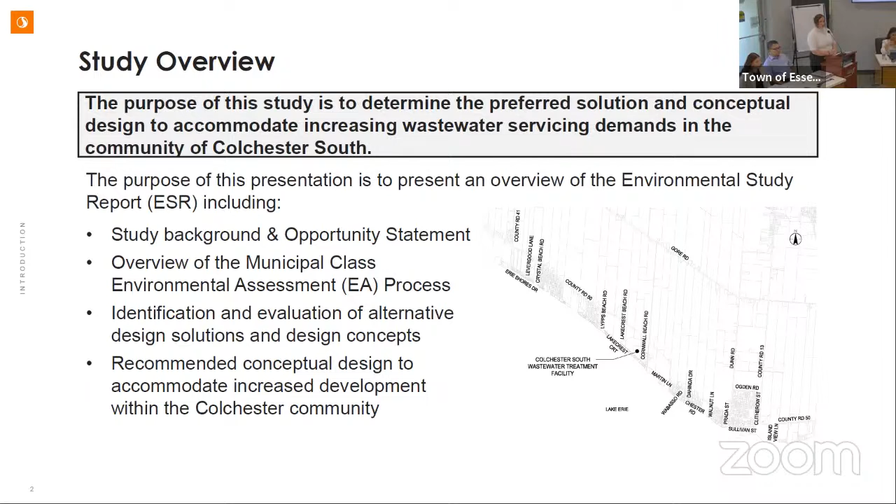For some background, the Colchester sanitary sewer system was designed and constructed in the 1980s. Based on this original design, there is a sanitary sewer system that services Colchester South from the north end at Ogden Street and County Road 50, on the east side at County Road 13 and Island View Lane, on the south side at Lake Erie, and on the west side at County Road 41.

The existing sanitary collection system consists of a gravity sewer system with 6 pumping stations. All of the wastewater is directed towards the center of this map, where it's pumped at pumping station number 1 into the Colchester South wastewater treatment facility. It's further treated and then outletted into Lake Erie.

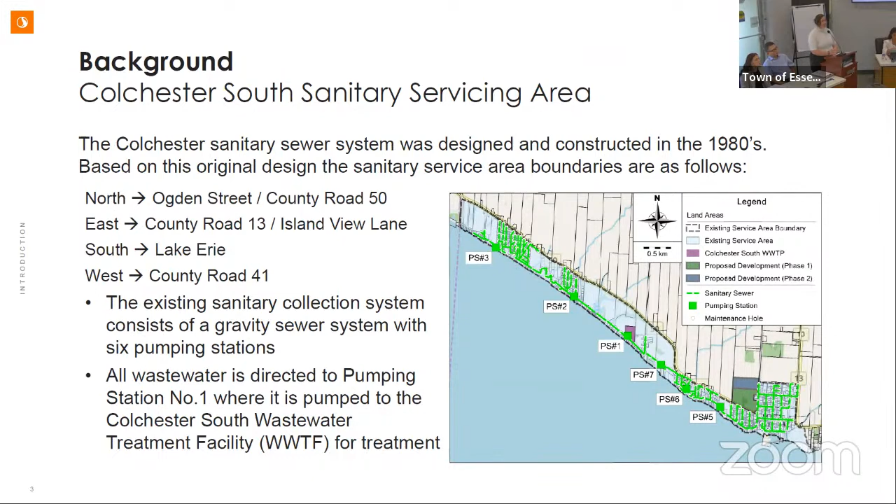The Colchester South wastewater treatment facility is located on a 12-hectare parcel of land south of County Road 50 with access off of Cornwall Beach Road. It consists of a three-cell aerated facultative sewage lagoon system with a rated capacity of approximately 1,800 meters cubed per day, and a peak flow capacity of 8,000 meters cubed per day. Based on the historical operating data, which we reviewed from 2015 until 2021, it has good historical operating performance. The final effluent concentration that is discharged into the lake is well within the non-compliance limits set by the Ministry of Environment, Conservation and Parks.

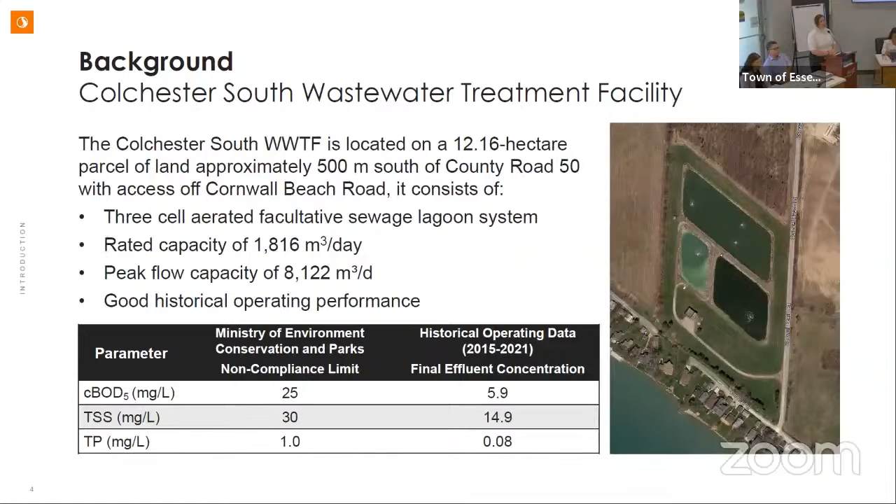As an opportunity statement for this environmental assessment, this Class EA was initiated by the Colchester Bay development, which is proposed west of the Colchester Urban Center, outside of the existing service area, meaning that it was not originally accommodated through the existing sewer system, pumping stations, and facility.

Some changes may be required in order to accommodate it. This development would potentially include mixed style residential units, parkland, a hotel, and some commercial retail spaces. So this represents an opportunity for some social and economic growth within the community.

This development would generate an increase in wastewater servicing demands beyond the existing capacity of the wastewater treatment facility. So as an opportunity statement, this study will determine a long-term solution to accommodate increased wastewater servicing from this proposed development, as well as other developments within the community and the existing Colchester South sewage servicing area.

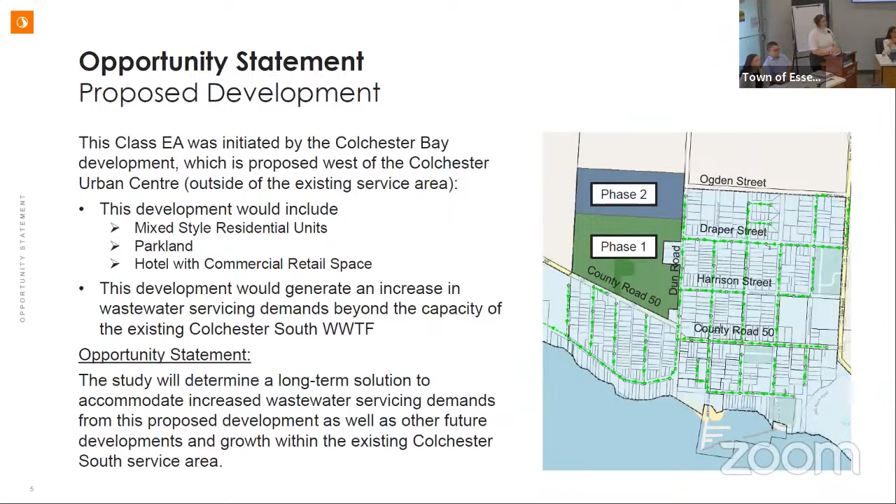Next slide. Now I'd like to present a background and the key features of the Class EA process, which was used throughout this. The Ontario Environmental Assessment Act aims to preserve, conserve, and properly manage natural, social, economic, and other environments and undertakings for any planning or developments within Ontario. So this work followed that standard procedure.

As a Schedule C project, it followed these 5 phases: phase 1, the review and identification of a problem or opportunity statement, which I discussed in my earlier slide. Phase 2 is evaluating alternative solutions to the problem. Phase 3 is evaluating alternative design concepts which can accommodate the preferred solution. Phase 4 is preparing an environmental study report. And phase 5 is implementing the preferred design.

So phases 1 through 4 were completed as a part of this EA study, and the implementation would be done as a part of future works.

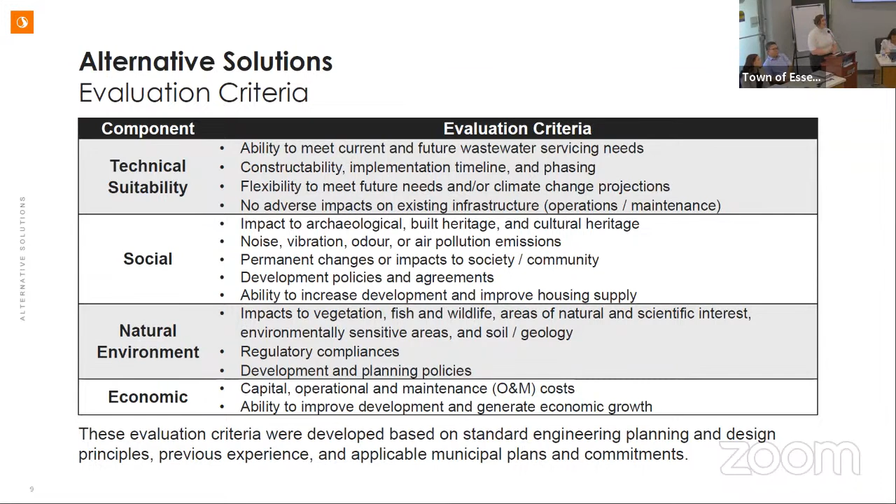Generally, they're split into 4 different categories: technical suitability, social, natural, environmental, and economic impacts. Each of the solutions was ranked or given a score in each of these categories, assessed based on these different criteria in order to get an idea of whether or not they would be considered feasible solutions.

Next slide, please. First, we started with a screening of the alternatives. The first 4 alternatives generally were not considered technically suitable. They wouldn't allow the community, or it wouldn't allow for those excess wastewater demands to be accommodated.

And that would not be seen as a socially or economically favorable solution, because it would then stagnate development, or no development would be allowed within the area. So that's the main reason why the first 4 solutions were not really considered a viable solution.

For number 5, discharging to a wastewater treatment plant outside of the Colchester community: the closest wastewater treatment plant would be in the town of Harrow, which is at a considerable distance from where pumping station 1 and the existing Colchester facility is. So although it may technically be able to accommodate those increased flows, there would be a significant environmental impact from installing the pumping stations or piping leading to the other facility, and that would also come at a significant economic cost. So that was not carried forward for detailed evaluation.

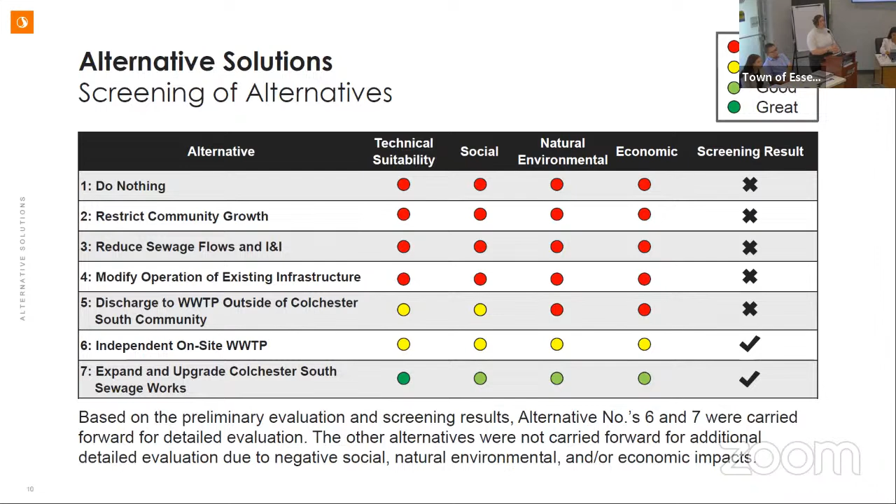Alternatives 6 and 7 were considered feasible in all of the evaluation categories, so they were brought forward for detailed evaluation. Next slide, please. This detailed evaluation showed that the most preferred alternative, and therefore the recommended solution, is alternative number 7, to expand and upgrade the Colchester South Sewage Works.

The significant reason for this is that it's able to accommodate additional development and wastewater flows from the Colchester Bay development, as well as other developments or natural growth that may occur within the existing sewage servicing area. Whereas the independent on-site treatment plant would not have as much flexibility for other lots within the service area or future development needs, whereas expanding the existing one, all of the wastewater for the whole area already is directed to this facility. So from a technical standpoint, it makes the most sense.

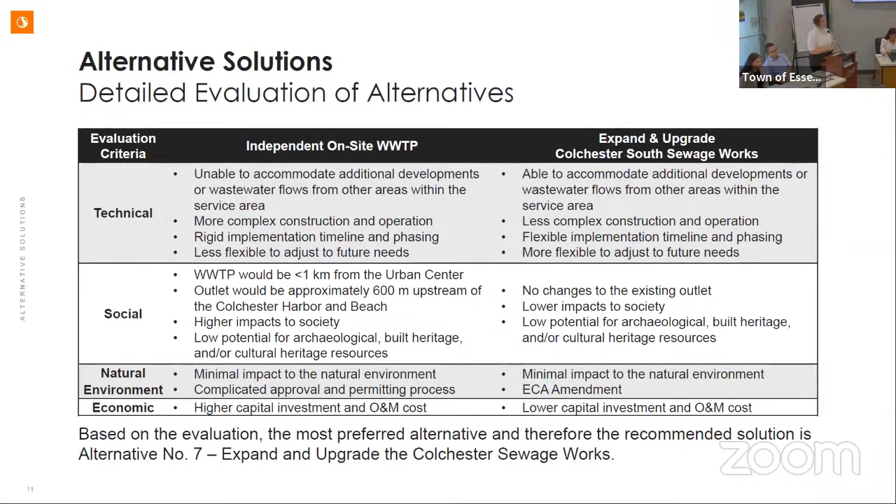There's also no changes to the existing outlet, which results in lower impacts to archaeological, built heritage, and cultural resources. So for these reasons, it's considered the most preferred alternative. Also, it comes at a lower capital cost investment and operation and maintenance requirements, as opposed to operating 2 facilities. You have to just operate 1 facility and continue to upkeep that. So for those reasons, it was considered the most preferred.

As a part of the next stage in the Class EA process, phase 3, alternative design concepts were identified and evaluated, leading to the selection of the recommended conceptual design. Alternative design concepts considered for the Colchester South Sewage Works generally fell into 3 different categories.

The first category was the sewage servicing analysis, where we looked at the existing capacity of the wastewater treatment plant, the pumping stations or lift stations, and the collection system or the pipes themselves. Next, we looked at the wastewater treatment technologies available that could be used at the existing facility to increase the capacity and also to meet any effluent criteria requirements. And the third category was the biosolids management strategies.

Any of these wastewater treatment technologies generally produce excess solids that are called waste activated sludge or biosolids. There's many names for it, but generally those need to be managed somehow and ultimately disposed. So these are the 3 general categories that we looked at for alternative design concepts.

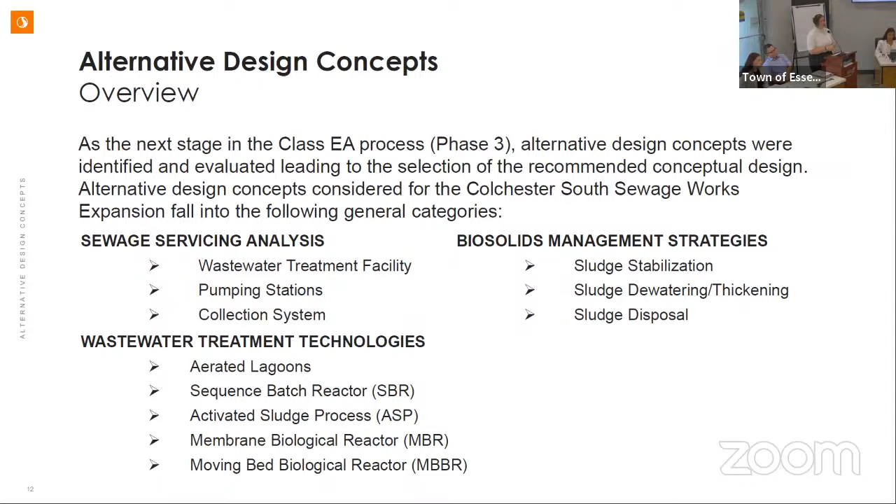For the sewage servicing analysis, we looked at the proposed development Colchester Bay phase 1 and 2, and then we also looked at 6 proposed developments within the existing service area. These were identified on the interactive mapping service for the town of Essex as developments that they would foresee occurring in the next 20 years. We also looked at the natural population increase based on Statistics Canada data for the community of Colchester South.

Based on those different factors, we determined the potential flow that would be going to the existing facility. And from this, if you look at the first total, it's approximately 2,000 meters cubed per day, which is greater than the existing capacity of the treatment plant. With the addition of Colchester Bay, it's significantly increased to approximately 3,600 meters cubed per day. Based on this sewage servicing analysis, we know that an upgrade to the wastewater treatment plant would be required.

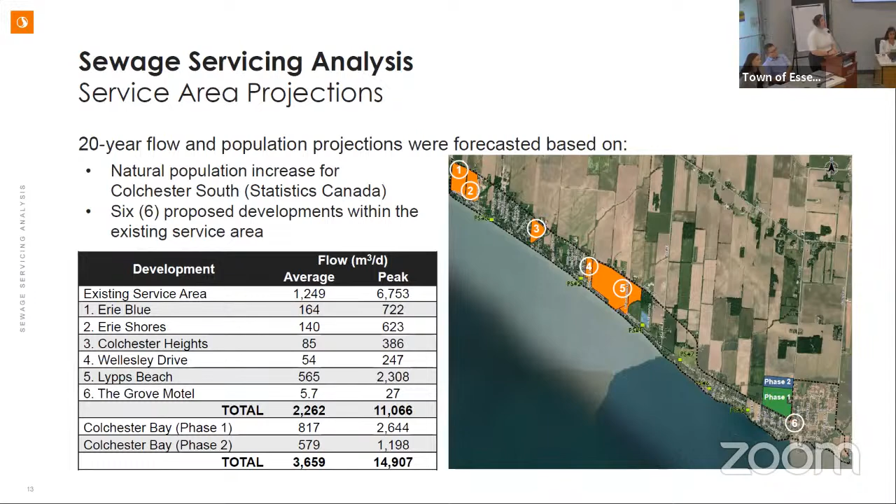For the sewer system analysis, we looked at the ultimate flow projections from the existing service area and the proposed developments, and it indicated that no pipe upgrades would be required, assuming that the flow from this development is distributed between multiple outlets. The existing piping was designed slightly larger, so it has the ability to accommodate this development without any changes.

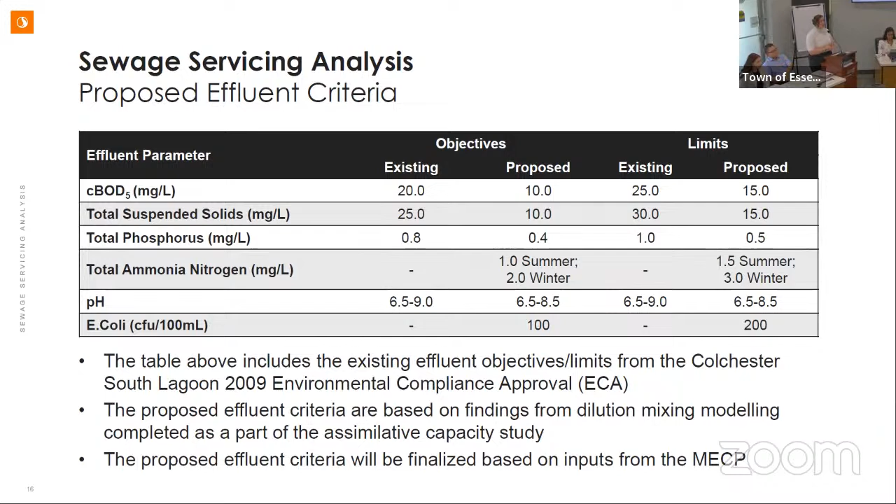The proposed effluent criteria will be finalized based on inputs from the MECP once this ESR is sent for additional comments. Next slide, please.

So the next phase of the EA, we looked at alternative design concepts for the wastewater treatment facility itself, and different treatment technologies that we considered to accommodate the increased flows from development were aerated lagoons, which is what's currently being used at the facility. We also looked at sequencing batch reactors, activated sludge processes, membrane biological reactors and moving bed biological reactors. Each of these would be outside the existing footprint of the facility. We have a proposed layout in our later slides, so you'll get a chance to see that.

Next slide, please. For the evaluation of wastewater treatment technologies, the SBR, the sequencing batch reactor, was identified as the preferred option because it's proven to generate good effluent quality at a moderate capital and operation and maintenance cost. And it's also the process that's used at the Essex Pollution Control Plant. This provides a benefit because the Ontario Clean Water Agency, who operates the Essex Pollution Control Plant, also operates the existing Colchester South facility. Having the same process used at both facilities means that they're more familiar with the operations and maintenance requirements of such a facility.

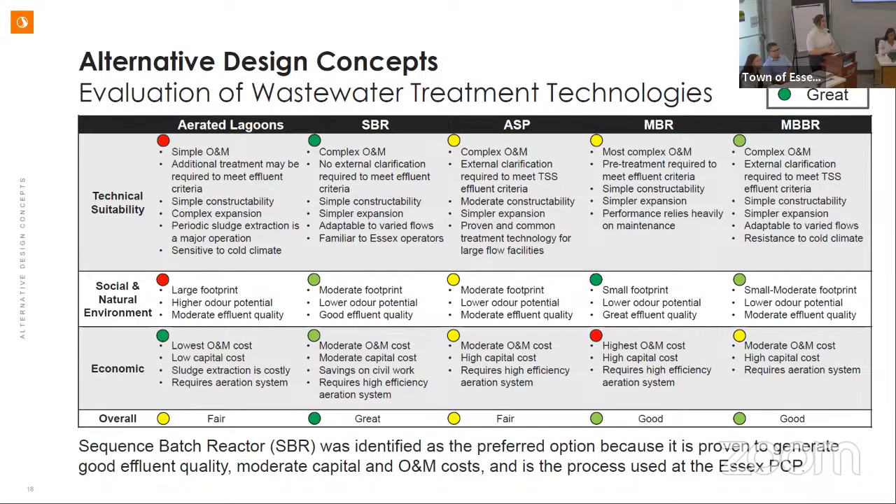There's also an opportunity to improve using the sequencing batch reactor. It's considered moderately complex to operate and maintain, but because they're familiar with this and there's potential for remote operation, this can become a lot easier for the town of Essex. There's no external clarification required to meet the effluent criteria, which means it'll have a moderate footprint on the site and lower potential for odor. It is anticipated that this facility without external clarification would be able to meet the effluent quality requirements.

Next slide. As the next phase, we looked at biosolids management processes. As I mentioned, there's typically excess solids produced at wastewater treatment plants that need to be managed, and that is typically done through a combination of these three processes: first being stabilization, second is dewatering or thickening, and third is disposal. For the size of the plant, stabilization was not considered a feasible option. It's typically very expensive, and based on the amount of biosolids that would be produced at this facility, it's not technically feasible to apply in this scenario.

So we looked at different options for dewatering and thickening paired with disposal. Alternative one was constructing a dewatering facility on site at the Colchester South facility and then trucking dewatered sludge to the landfill. The second alternative was trucking liquid sludge to the Essex Pollution Control Plant, where there is an existing dewatering facility. It would then be dewatered, and that dewatered sludge would be trucked to landfill.

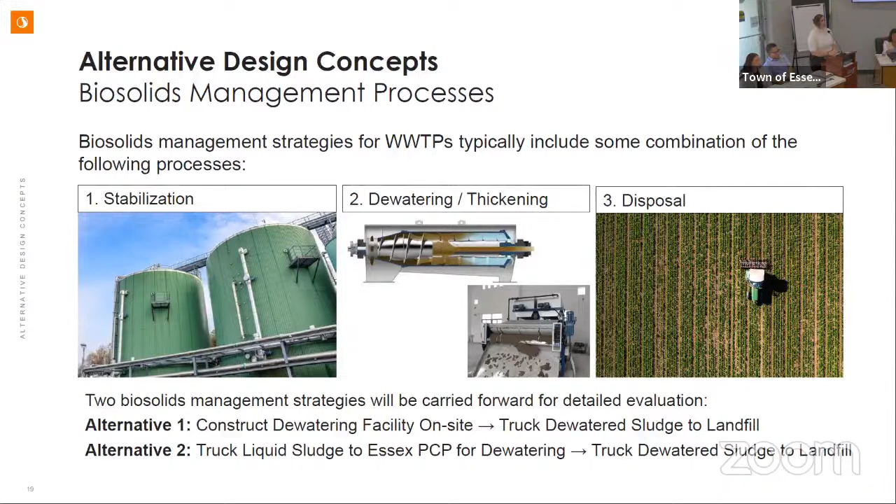Next slide, please. So when comparing these two alternatives, trucking the liquid sludge was identified as the preferred option due to a lower footprint requirement at the facility and lower capital costs. The construction of an on-site dewatering facility could be reconsidered when there's major upgrades being proposed to either of these facilities in the future. The major difference between the two, aside from the operation and construction side, is the number of truckloads and the impact that those truckloads would have on the community that lives in that area. For the dewatering on site, there would be an average of 1 truckload per month, whereas for the trucking to Essex Pollution Control Plant, there would be an average of 4 truckloads per month, which is not considered a significant impact in comparison to the operation of this dewatering facility at the site.

Next slide, please. So here we have the proposed layout for the plant upgrades. The proposed layout for an SBR plant at the Colchester South facility would include a screening and grit building, followed by the sequencing batch reactor systems with a sludge holding tank and a blower building, and a UV disinfection building. In the future, depending on the upgrades or the requirements from the Ministry of Environment, Conservation and Parks, a dewatering building or a tertiary treatment unit could be implemented. During detailed design, the addition of these units could be considered. And in that case, if the MECP requires the proposed facility to meet more stringent effluent criteria, then these could be potential units implemented to meet those goals. The proposed site layout is positioned such that there's a minimum of 100 meters from all residents on each side of the facility, and this is based on the MECP design sewage guidelines.

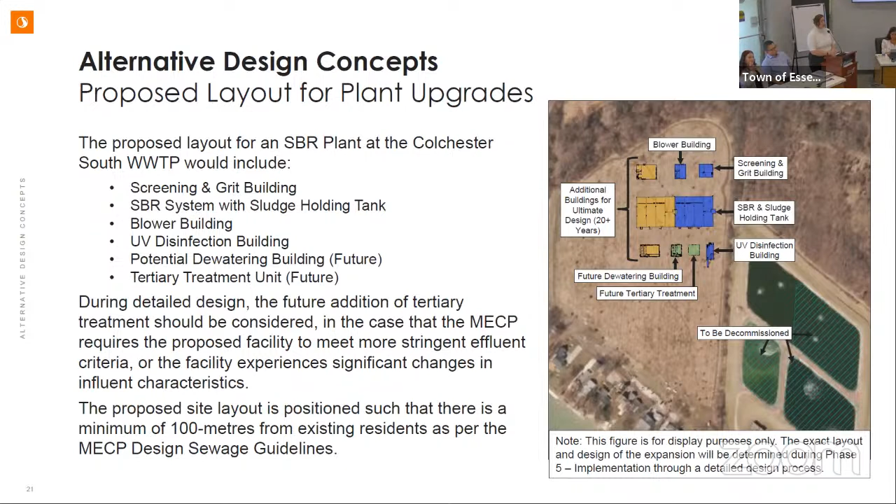Next slide. For the next steps of the Class EA process, upon council approval, the project would proceed to next steps, which include finalizing the study report, posting the notice of completion, and distributing to review agencies and the public. There would be a 30-day review period, and then we would file the final ESR, after which it would move forward into the implementation phase of the Class EA process, which would include a more detailed design.

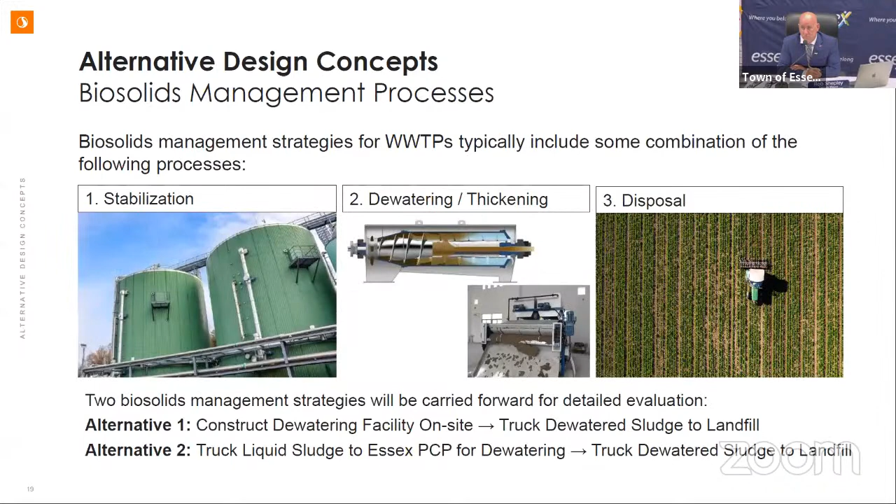Thank you, Mr. Deputy Mayor. So if we go back a couple of slides, there was an evaluation of the biosolids management. The two alternatives discussed were dewatering on site and disposal at the landfill, similar to what you see at the Essex Pollution Control Plant, as well as dewatering at Essex and disposing at the landfill there. They were assessed from a technical, social, natural environment and economic perspective. So there are multiple factors, including the environment, that were assessed.

When you look at the natural environment, we also have to be keenly aware operationally of what we're doing. We already have a dewatering facility at Essex. So there is a synergy there for a low cost option to transport the sludge to Essex to take care of it. As Chrissy had mentioned, we're not talking about a significant amount of truckloads. We're talking about 4 per month, so 1 per week. So it's not something that I see as a major detriment.

But as Jan mentioned, we will assess that during detailed design when that time comes, and we'll look at it again from many of these factors. Does it make sense operationally to continue to send sludge to Essex if Essex is inundated as well? We'll assess those things when it comes time to implement some of these suggestions. But as a high level study, the study suggests that we continue to dewater at Essex and utilize that facility.

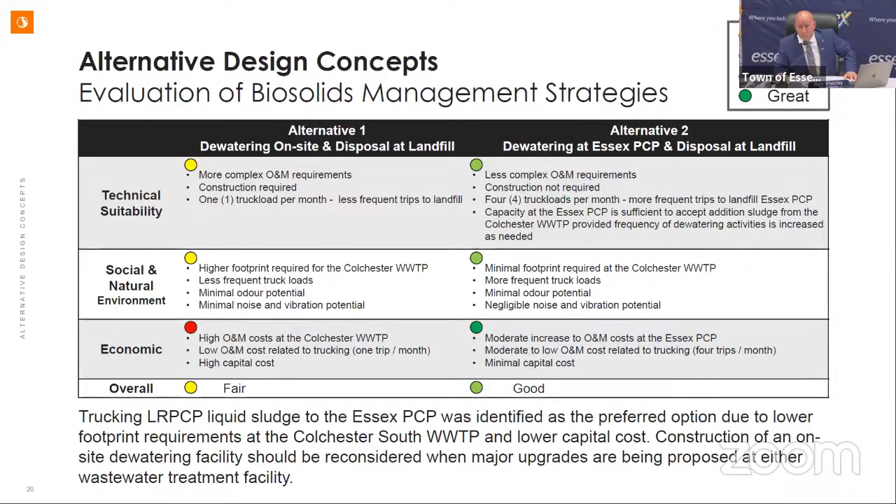Deputy Mayor, thank you, Director Gerard. I just wanted to have that conversation about these trucks, and I guess the next piece would be the 4 trucks. We also heard that on the Friday too. So what is that based on? Like, if we just had the one new development, because we've seen these projections for some pretty significant changes in the next few years, right? So what is the 4 trucks based on?

Through you, Deputy Mayor, I can answer the question and then I'll maybe pass it on to our consultant to answer it in a more technical fashion. But when you build a plant, all that development doesn't come all at once. It ramps up as development occurs. So I believe what they're quoting on the 4 trucks is the maximum for the full capacity of the rated capacity of that plant. So it would ramp up to 1 a week. It may be 1 every 2 weeks for a while, 1 every 3 weeks for a while, but the maximum would be 1 every week. And maybe we'll have Stantec confirm that.

That quote for 4 truckloads per month is based on the 20-year design, which is the firm capacity of this expansion. So, approximately like Kevin said, it would ramp up at 20 years time. If all of these developments occurred, that would be the number.

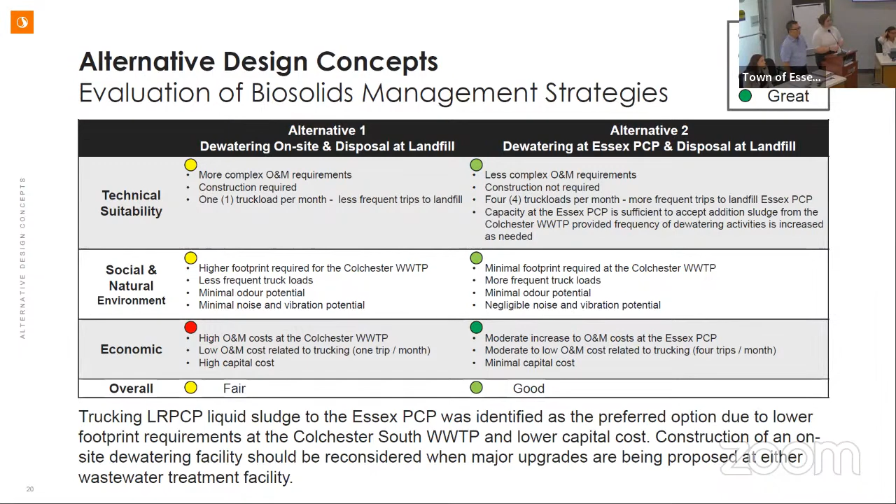So say there was no development, just based on what's currently been happening from 2015 to 2021, you're at 57% of your treatment capacity. So no upgrades would be required based on the existing residences, dwellings, all of that. With development not including the Colchester Bay, you would be at 125%. So regardless of this Colchester Bay development, you would still need.

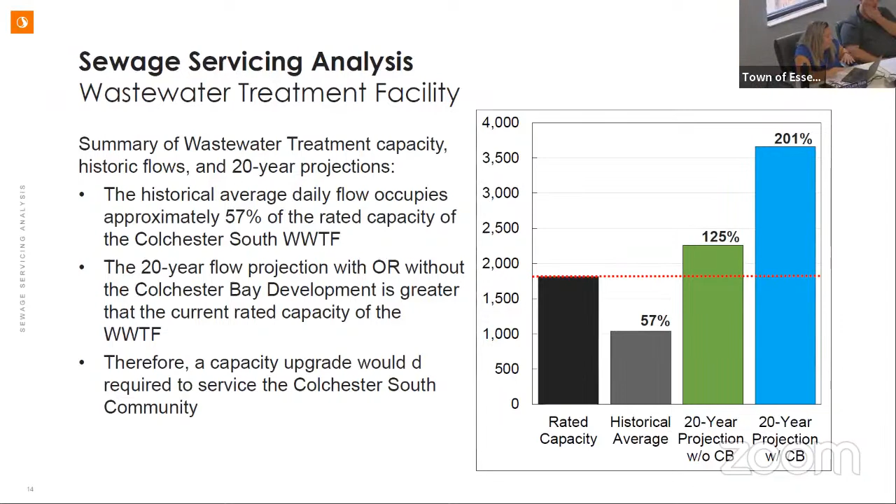Just to clarify, I'm assuming this is on what we currently have. Is this what we currently have? My question is, we build this new facility, nothing else is built yet because there's no shovels in the ground. So we approve this, council approves, it goes through, we build this facility tomorrow. What is the capacity at without any further development? Does that question make sense?

Yeah, so it would be 125% for 20 years. Because if you do nothing right now, you plan. This 57% is already there. So you have a spare capacity of 43%. That 43%, if you do nothing now, is only able to accommodate that growth over the next 20 years. I'm not sure that answers the question?

Mr. Nucio? Or if you were to build a new plant per what's there, you're at about 28% capacity of the new plant. I think that's the number you're trying to get to. Building this $43 million plant, we're gaining about 25% more capacity is what I'm getting at. Right now, we're at 57%. We build the new plant and we'll be at 25%. So putting $43 million into this, we're really only gaining 25% more capacity. Miscommunication. Go ahead.